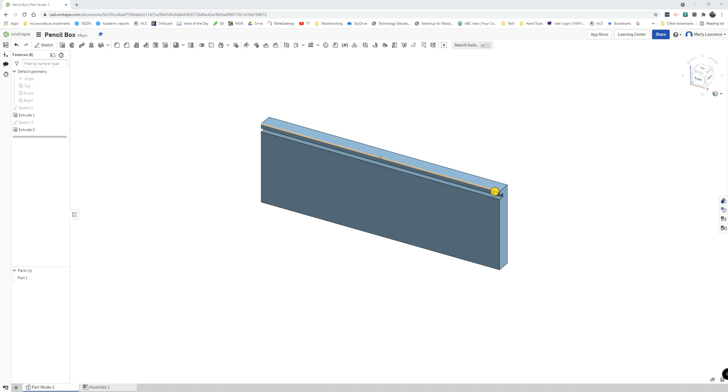Okay, in this video I'm going to continue the pencil box and demonstrate how to do the rebates. We did those in the classroom, where we marked them out and cut them out. It works in a similar way here: we mark out and then we cut out. In fact, we don't use a command called cut out, we use the extrusion command, hopefully you've realized that from previous videos. If you haven't already, you should watch the editing video, because I adjusted the sizes, and you should already know how to log in and use some of the commands.

So we're going to create a sketch. Click the sketch button and we get the dialog up here. What plane do you want to put the sketch on? We're going to click on this front plane here.

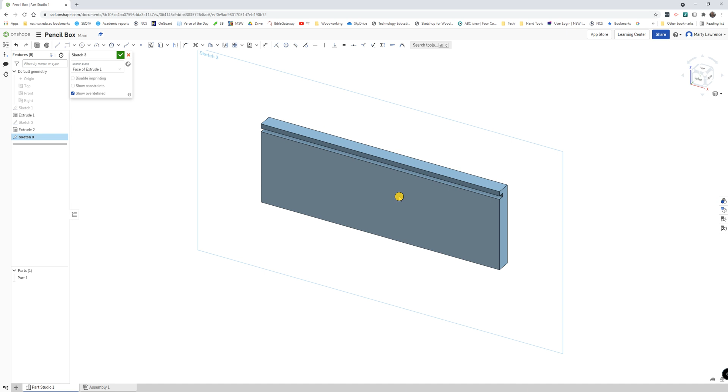Like we did in the classroom, we did our marking out on the groove, on the face where the groove is. We're going to do the same here. So we click this plane, and it'll be good to view this front on. We could click the view cube, or another way is if I right click and go view normal to sketch plane. We'll also view it front on.

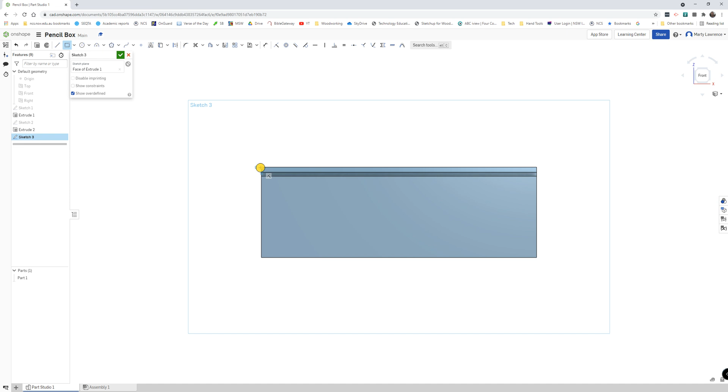We're going to use the rectangle tool, so click that to select it. We're going to start the rectangle in the corner here and end it on this edge, so you get a little square when you're in the corner, make sure you got that little square. Click once, move the cursor down and click here. Because this needs to be done on both sides, we're going to do the same thing over here. Click once in the corner, click on this edge.

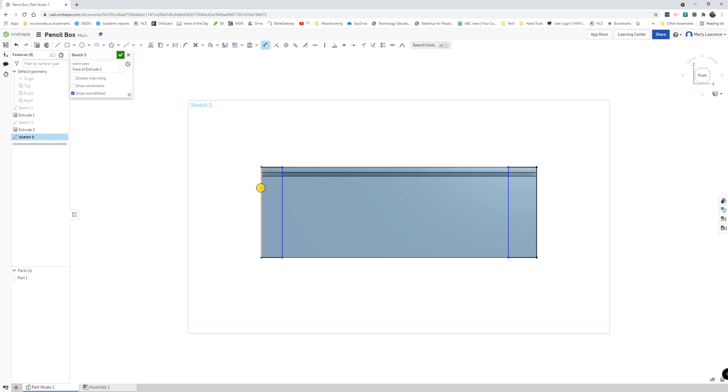Now we need to adjust these sizes, so we use the dimension tool. Select the dimension tool, click once on this outside edge, click again on this new line that we've drawn, move up and click again. We're going to make this 12 millimeters, and press enter, and it will adjust.

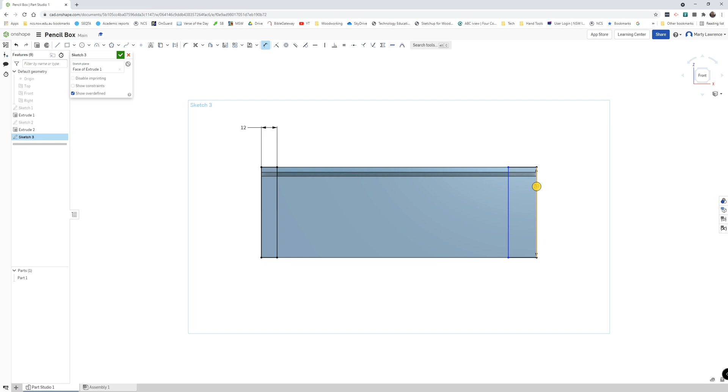Do the same thing over here. Click once on the long edge of that rectangle, click again on the edge of the existing rectangle, click to place it and type 12 and enter. That sketch is now complete, so we can click the tick.

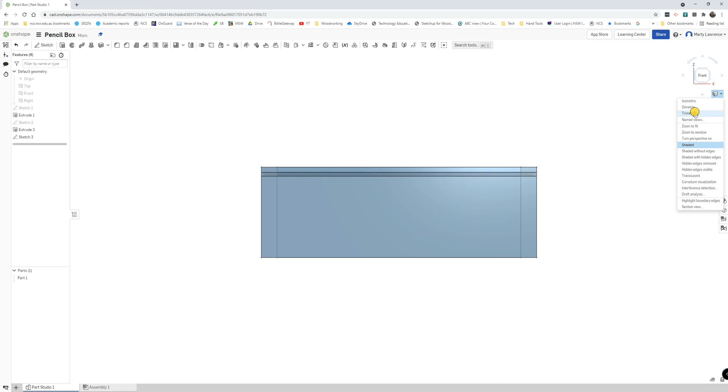Again, this will be easier to view three-dimensionally, so we're going to click that. I'll just zoom backwards a bit and adjust here. What tool do you think we use? If you guessed the extrusion tool, you're right. So look for extrude in the toolbar and click it.

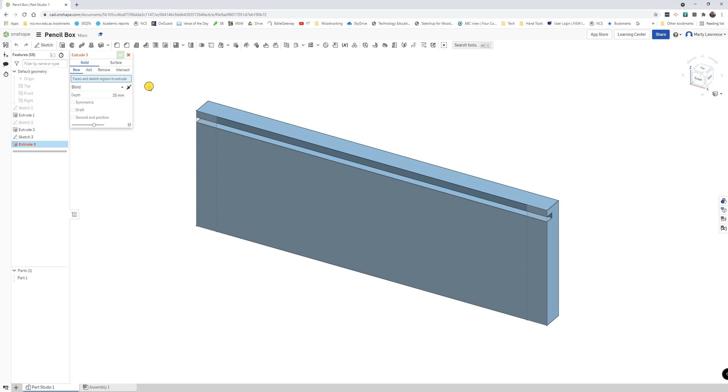What faces do you want to extrude? Notice that even though we drew one rectangle, the program has broken it into two, so we actually have to select both here. We click once, click again on the other one. Now that's wrong, isn't it? Because it's adding to it.

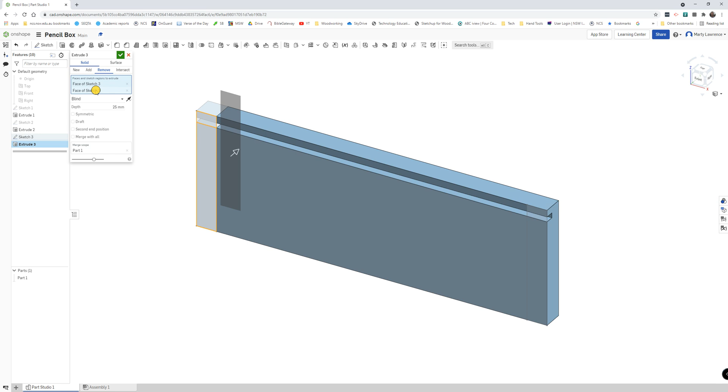We actually want to do a remove. And that's way too deep, so we need to change this to 5. Press enter and you can see what it's going to do. But we need to do that on both sides.

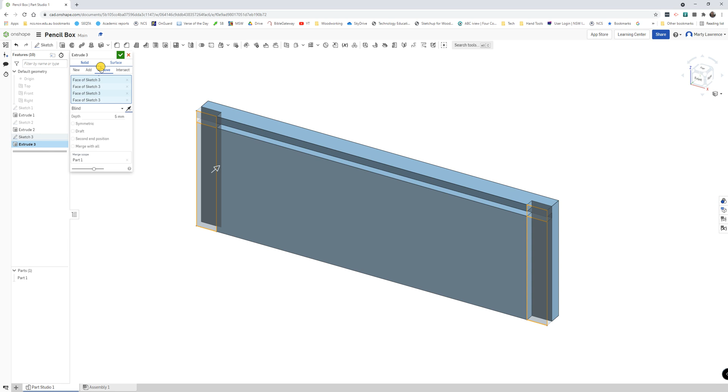So with all this still open, we can go and click these two rectangle segments over here. It'll give you a preview of what it's going to do, so it should look like that. Remember, we've got this opposite direction button, so make sure it's cutting away. Make sure you're on the remove command, and then tick.

And there's our rebates. That's it for this video. We will continue drawing this in the next video.